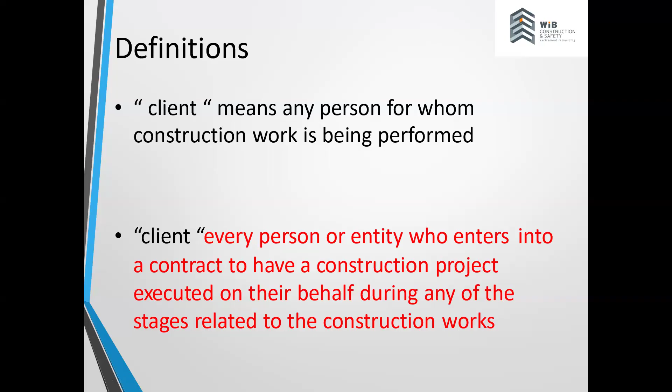Okay, the next definition was the old one. I've placed it in red font just so that you can see what the change has been implemented, or what they're proposing. So the next one is client: means any person for whom construction work is being performed. What was changed was - every person or entity who enters into a contract to have a construction project executed on their behalf during any of the stages relating to the construction works. Now we all understand when they're referring to the stages, they're speaking to the 6 stages which I previously presented.

Next, we have a new definition, which is the construction health and safety manager. Now, this was one item that I also strongly pushed from my end, because I felt that the construction health and safety manager were neither here nor there. It was mentioned in the gazetted notice that was shared, which was signed many, many years back by Thobile Lamati.

He was the previous chief - not chief, I forget his title now, but he was one of the senior guys at the Department of Employment and Labour, and he had submitted this gazetted notice. On there, it indicated that there was a CHSO, as well as the CHSM, which is the Construction Health and Safety Manager, and the PR agents, who are required to be registered with the SACPCMP.

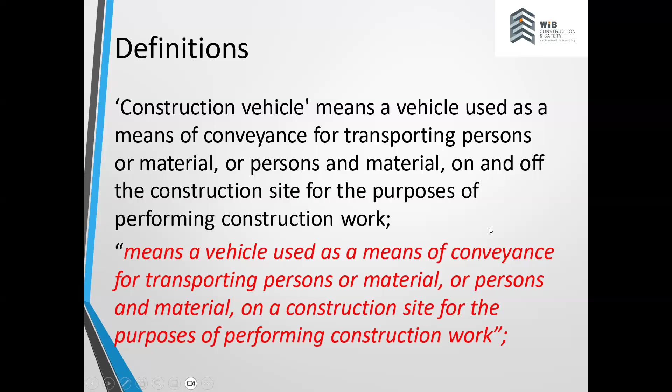Next, we had the construction vehicle, which was in the previous section. The new one reads, means a vehicle used as a means of conveyance for transporting persons or material, or persons and material on a construction site for the purposes of performing construction work. So that was just a clarification that was changed.

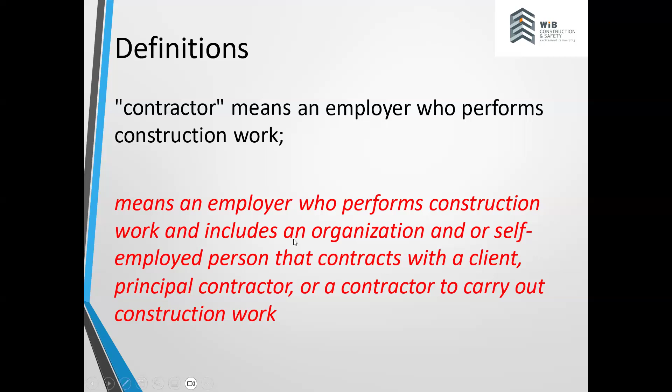Next, we have the contractor. So the contractor in the previous one means an employer who performs construction work. Very vague. In the revised one, we've indicated it means an employer who performs construction work and includes an organization and or self-employed person that contracts with a client, principal contractor, or a contractor to carry out construction work. So it's a lot more prescriptive and descriptive in this definition.

Next we have design. The definition of design, in relation to any structure, includes drawings, calculations, design details, and specifications. The revised one reads, design includes drawings, design details, specifications, and bills of quantities, including specification of articles or substances relating to a structure, and calculations prepared for the purpose of a design.

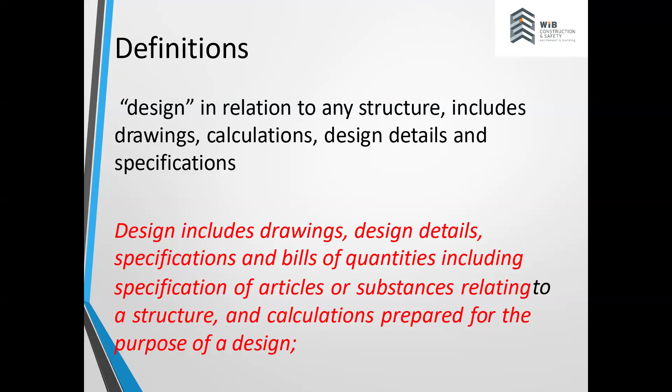Now, what's important here, and because of time I don't have so much time to go into too much detail, is a huge focus has shifted now to the designers, because a lot of the projects where large fatalities or large numbers of personnel have been killed, especially with, for example, the mall in Tongaat, that's a perfect example, a lot of them are relating to the design. There was poor design calculations, poor design when it came to consideration of the material to be utilized, the curing times. All of that was not properly defined by the designers. In the past, they were always the guys that were not in the firing line. But with the current revised construction regulation, the focus is now shifted a lot onto the clients and onto the designers as well. And then you'll see also some parts for the principal contractors and contractors also.

Under ergonomics, what we've also tried to do here is to align everything that is already existing. So for example, if there's an ergonomics definition under the ergonomics regulations, we're now utilizing that definition. Why? Because we don't want to create confusion within the industry by having different terminologies being utilized. We want to clear out any of that and ensure that everybody is aligned and using the exact same information.

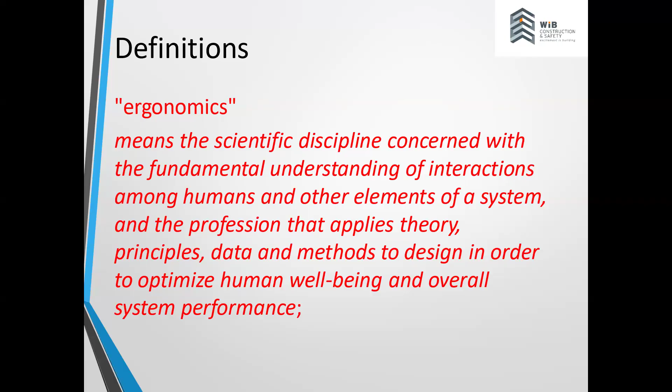So when we're referring to certain definitions, we should all be speaking from the same hymn sheet. Under the section, it says ergonomics means a scientific discipline concerned with the fundamental understanding of interactions among humans and other elements of a system, and the profession that applies theory, principles, data, and methods to design in order to optimize human well-being and overall system performance. As I said, if you go to the ergonomics regulation, under the definitions, you'll find exactly the same definition used there.

Under excavation works means the making of any man-made cavity, trench pits, or depression formed by cutting, digging, or scooping. The current one reads, means the making of any man-made cavity, trench pits, or depression formed by cutting, digging, or scooping, read with the definition of construction work. Now, why was this specific point added in here as well? To understand this, people were getting confused whether they are digging at a grave site, for example.

Okay, they're using an excavator there. They need to dig a grave.

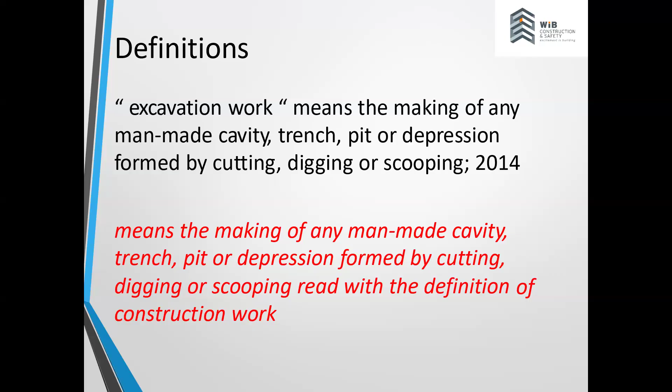Now the people were wanting to apply for what you call this, a notification of construction work, your annexure 2s. They wanted to start, so they started taking those to the Department of Employment and Labor. The definition was important to add because they need to understand that this is relating to construction work. It's not just only about making a man-made cavity, trench, pit, or a depression, etc., but it must be making it within the scope of work relating to construction.

So they're still working on the logistics around how they're going to manage this, because issues pertaining to no internet access can have an effect on inspectors coming to sites and not being able to view this electronic file. So all of those things need to be considered, and that's what we've been working on to see how they'll close out that issue. But the only change is besides the physical file, there's also the option of the electronic file on site.

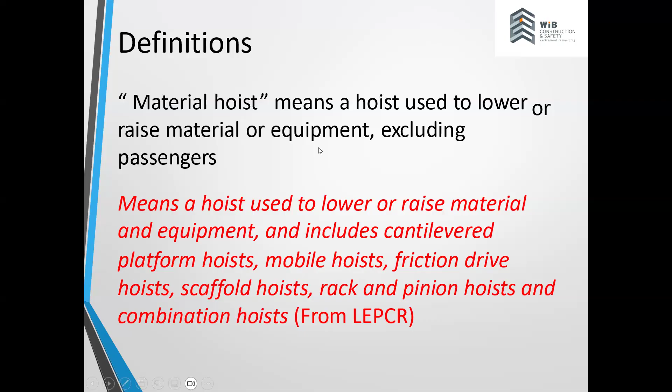And then when it came to a material hoist: means a hoist used to lower or raise material or equipment, excluding passengers. Now, in the revised one, it means a hoist used to lower or raise materials and equipment, and includes cantilevered platform hoist, mobile hoist, friction drive hoist, scaffold hoist, rack and pinion hoist, and combination hoist. So this is now all the different hoists mentioned within this, but you can clearly see it excludes passenger hoist, or your LEPCR, right?

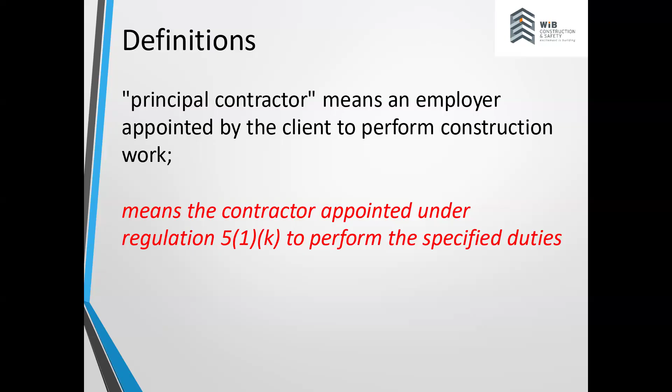And then here we have your professional engineer. Now, you would see that what we've also included, which was not on the previous one, is professional technologist or professional technician or certificated engineer, means a person holding a registration in terms of the Engineering Professions Act 2000, Act number 46 of 2000. So you can see this is now going back to ECSA, which is one of the bodies under the CBE.

And then provincial director, they've just included additional information: means the provincial director, as defined in Regulation 1 of the General Administrative Regulations, 2003, also referred to as the Chief Director, Provincial Operations. So they've just added that information in there as well.

And then what's new is also the terminology of project. It means a project which includes or is intended to include construction work, and includes all planning, design, management, or other work involved in a project until the end of the construction phase. That term was not included in the definition.

And then you have additional information relating to pre-construction, which was also not included. And why this is so important is because, as I explained, a lot of the fatalities that were happening on projects especially were relating to design issues and issues pertaining to pre-construction work that had an impact on the actual execution of the construction work itself.

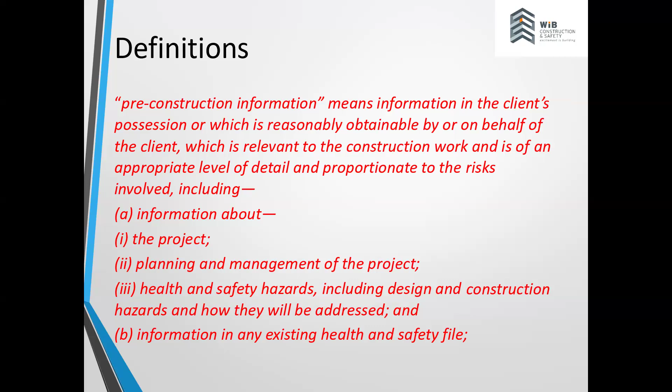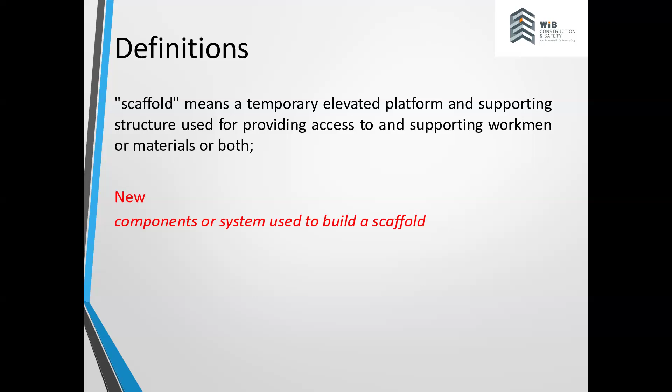And then under scaffolding, all we've done here is it's components or system used to build a scaffolding. You would see even in section 16 of the construction regulations, we've basically referred it to the SANS 10085. Instead of reinventing the wheel relating to scaffolding, all we've done is refer everyone to the SANS standard, which is our guideline that we need to follow. Everyone will use the same thing, so that there's no ambiguity and no confusion created.

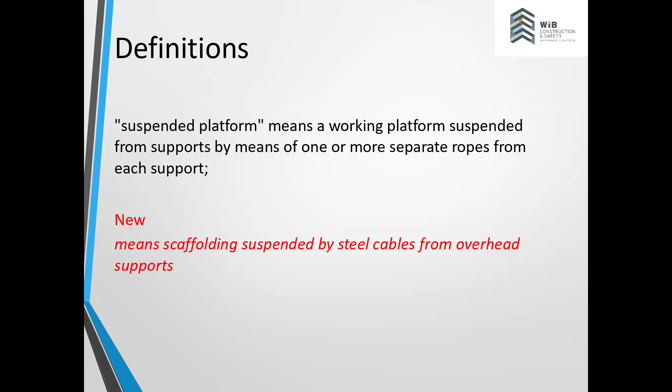And then when it came to a suspended platform, this created a lot of confusion within the industry, because every time somebody had a scaffolding built and it was a hanging scaffold, everyone was running around like headless chickens, because we needed to go to the Department of Employment and Labor for approval. Why? Because everyone was of the understanding that this is now a suspended platform. So the definition is clear. It says, means scaffolding suspended by steel cables from overhead supports. So that takes out the confusion of a hanging scaffold being considered now as a suspended platform. So it's quite clear.

And then under section 2.1 and 2.2, these regulations are applicable to all persons involved in construction work for the duration of the project life cycle. Also in regulation 11.2, it's applicable to owners of structures for the future lifetime of the structures as well, because that was also an important factor to consider. Many a time, everyone focused only on the actual construction execution, but the inspections that needed to be done thereafter, nobody went back and verified that these things are being done, or who's verifying that they are being done. So now it's being added into the regulations.

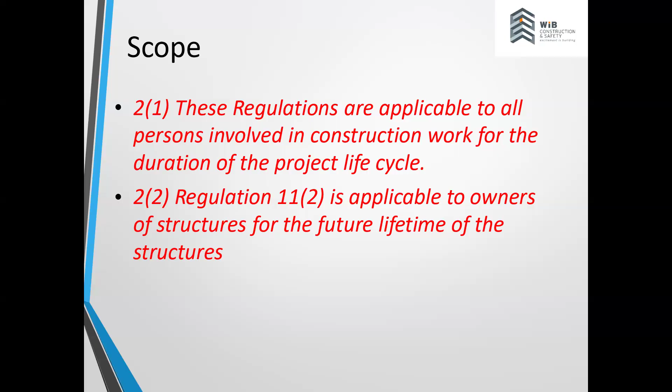So under the construction work permit section, you'll see the items in red. If everybody would remember, let me see. Okay, there's an exemption here. Let me just show you this first.

So on the 24th of July 2015, there was a government gazette notice 641, and that one had specific criteria and requirements relating to the exemption. Then the next one came out that was signed by Mr. Szana, Tibor Szana, on the 7th of August 2018, and that exemption is still in effect even up until today. It's still being used.

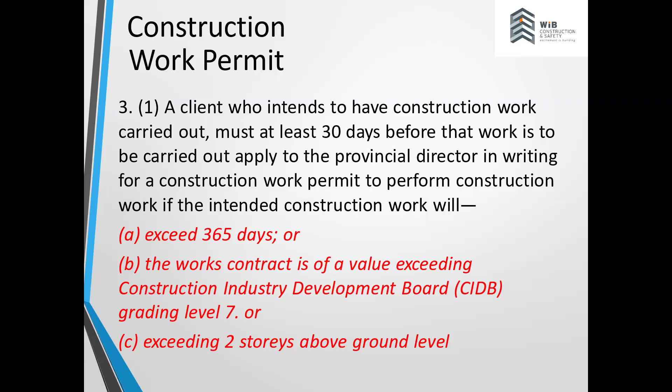And in your annexure 2, that's pertaining to your notification of construction work. So nothing has changed in this regard. Obviously what would change is the appointment letters.

I just want to run on this one, and I'm going to go quickly into the appointments because of time, so that we can make sure we get everything discussed as much as we can for this period we're together.

Under CR 5.1, you see that what we've included into section A is prepare a documented design risk assessment for an intended construction work project. Now the requirement for this is not only on the client, it's also on the designer. The designer is also required to ensure that there's a design risk assessment in place; the client will make sure that the designer has conducted the design risk assessment.

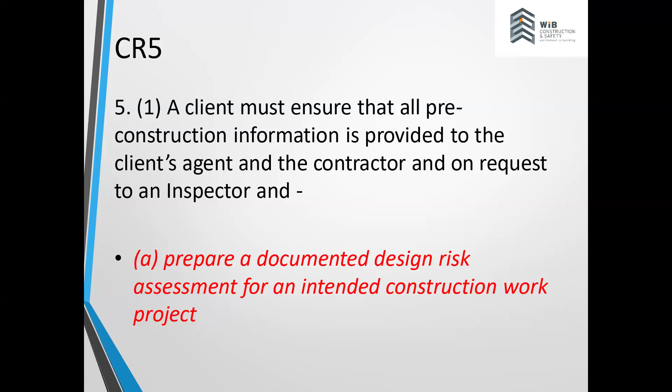So you would see that the baseline in itself will then fall away from the permit requirements because of the design risk assessment now that has been put into play. So the baseline risk assessment conducted by the principal contractor will still be done, but it is no longer the requirement of the client.

That's just speaking about the specification. Nothing's changed in this regard, it's still the same. And then what we've added here under the section is the designer takes the prepared health and safety specification into consideration during the design stage and provides a written report. That was not a requirement before.

Another important point here is to ensure that potential principal contractors submitting tenders have made adequate provision for the costing of health and safety. What we found in the past was that principal contractors were submitting tenders, but they were putting in the lowest cost they could because they were trying to get the job. The problem was that they were costing so low that they were cutting out the requirements of safety that needed to be implemented on those projects.

So with this being included in the proposed construction regulations, the changes are now forcing all contractors to ensure that proper provision for health and safety has been made and that it is something that is notable. So even if you're going into a kickoff meeting or bid clarification meeting, you should be able to ask as a client, client agent, or representative: show us your costing, how you costed for this job when it comes to health and safety.

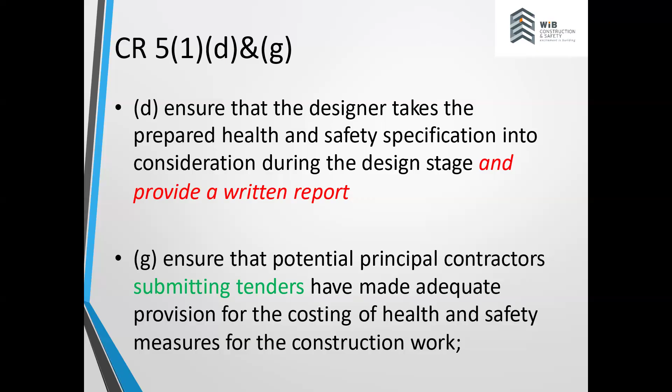What provisions were made? So now we can clearly see that companies are going to have to beef up their tenders when compiling them. They're going to have to beef it up so that they are not just going in on the bare minimum, but they now have to come up to the level required by law. And then after that, they can consider all other aspects of their costing.

The next one is pertaining to: provided that where there are multiple principal contractors or contractors on site, the party appointed by the client shall coordinate cooperation between contractors to ensure health and safety control. So this is now putting a lot more onus on the client. Obviously, the client will shift the responsibility to a construction health and safety manager or to an agent, depending on the size of the project.

And then this is just an inclusion to say: provide sufficient information and resources to the principal contractor. That hasn't changed. And then, as I said before, physical or electronic health and safety file — that's the only change there.

Now this is what I wanted to quickly touch on — some of the major changes that have come into play under section 8. 8.1 stays the same; that was previously the construction manager. Under section 8.1, remember previously it was 8.2 for the assistant construction manager. We've now added 8.1b, which clearly groups them into one bundle, showing 8.1 relates to the construction managers, and 8.2 relates to the construction health and safety managers.

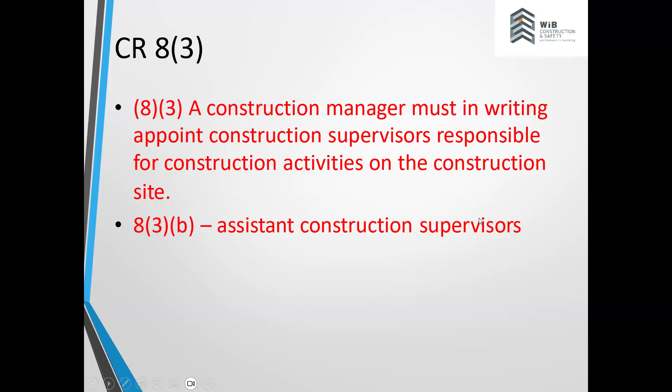Under section 8.3, a construction manager must in writing appoint construction supervisors responsible for construction activities on the construction site. Remember that was 8.7, and 8.8 was relating to the assistant construction supervisor. You see, we've grouped it as 8.3 and 8.3 - they should have actually read 8.3B. I must actually just speak to them about that. So 8.3B would have been the assistant construction supervisor under this section.

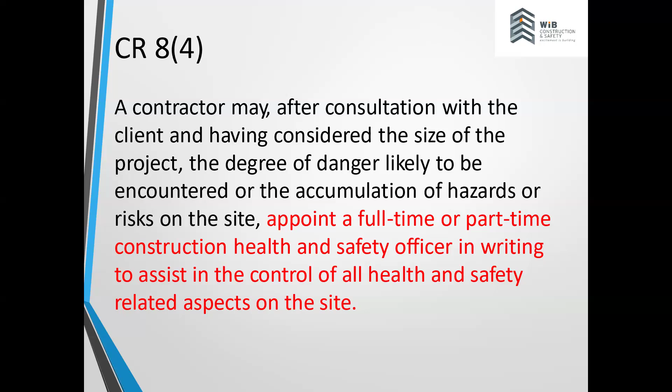And then a contractor may, after consultation - this is relating to the safety officer. So you see that the safety officer appointment was also changed. It was 8.5 before, it's now moved to 8.4. So it appoints a full-time or part-time construction health and safety officer in writing to assist in the control of all health and safety related aspects on the site.

That's the only change there to the safety officer section. And then this is still the same, nothing has changed - obviously we've just included the health and safety manager within the section as well, for the inspector to determine if there's a sufficient number of construction health and safety managers on that project. So they can look at the project based on risk, based on location, based on size of area, etc. There's various aspects they can utilize to determine whether one safety manager is sufficient or more than one safety manager and officers would be required for that specific project.

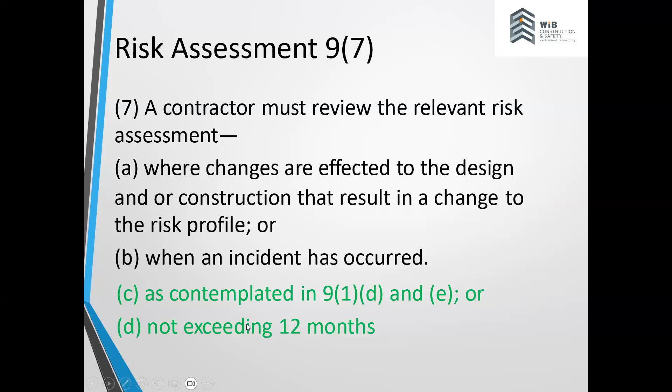And then under section 9, what we've included is section C as contemplated in 9.1D and E. So it's just relating again to that specific section, and it is not exceeding 12 months when it comes to our reviews of risk assessments. So we've been a bit more prescriptive in that regard. Yeah, nothing has changed.

So this section has changed relating to section CR13. So this is not Cyril Ramaphosa 13 - this is now relating to Cristiano Ronaldo. This is relating to the excavation section, right?

So where any uncertainty pertaining to the stability of the soil still exists, the decision from the designer referenced in 6.1, which is the appointed designer by the client, is decisive, and such a decision must be noted in writing and signed by both the competent person contemplated in sub-regulation 1 of this section and the engineer or technologist, as the case may be. So you see that we've linked this section back to the designer, so that we make sure they have the final say when it comes to such decisions being made.

Because we've encountered it too many times where people were passing away because of engulfment due to collapses of walls, etc., that are not being properly shored or braced, etc., with no proper consideration for the design of that and the stability of it, considering the soil types.

And in continuation of 13, it speaks about ensuring that no load material, plant, or equipment is placed or moved near the edge of any excavation where it may cause its collapse and consequently endanger the safety of any person, unless precautions such as the provision of sufficient and suitable shoring or bracing are taken to prevent the sides from collapsing.

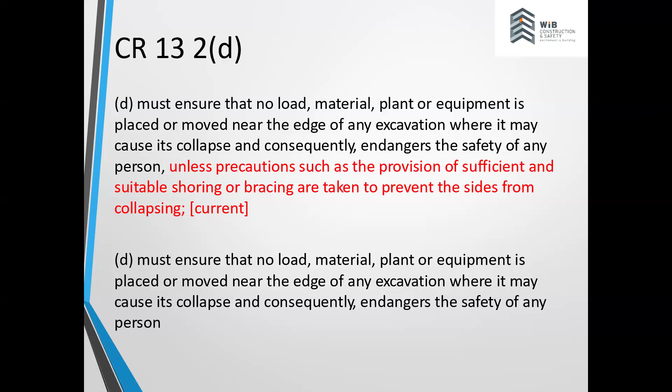So you can see that this was not considered previously. We know that shoring and bracing was being utilized, but some people argued the point and said the law doesn't require it because it's not stipulated. So we've now gone more prescriptive in that regard.

Okay, so under demolition work, that stays the same. We've only included that the competent person in writing supervise and control all demolition work. And here again, we've referred to it being carried out by a competent person, and that the method statement on the procedure to be followed in demolishing the structure is developed by that person. So it's clear now to understand who is the person in charge - it is a competent person who is there to supervise the demolition supervisor.

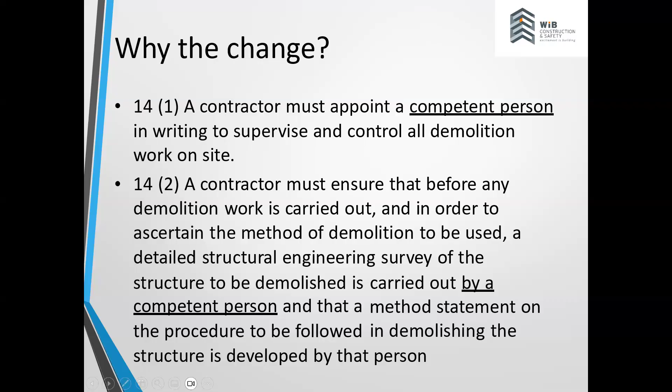And then other changes to CR14: 14.6 and 14.7 have been moved to Construction Regulation 27.

Section 49 has been updated to the asbestos abatement regulation. Obviously, we know that the previous one referred to the asbestos regulations, and that's been revised to the asbestos abatement regulation of 2020, and then also relating to specific reference to the Explosives Act and regulation. It's not a legislation, okay, it's just referred to in that section.

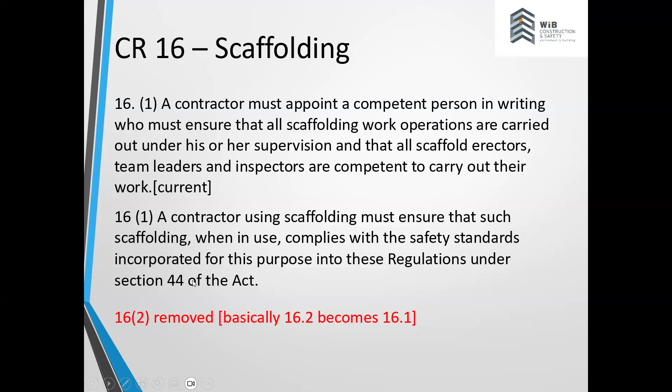Pertaining to scaffolding, section 16.2 has been removed. Basically, 16.2 has become 16.1. And as we said, the requirement is that you need to follow the requirements of SANS 10085.

Okay, so rope access - this is new. The section is to ensure that all rope access operators are competent to carry out their work. What's important to note as well is that the Working at Heights Institute has been... well, it's not really accredited - they've been certified as a body by SAQA, which allows them to certify contractors, trainers, etc., to ensure that the people being trained are competent.

So they are now in the process of getting training providers enrolled with them, and they will start having specific criteria and requirements for these specific people, including rope access, utilization of mobile elevated work platforms, and scaffolders. All of that will fall under their scope of work. So that's just a heads up with regards to what is coming on the horizon.

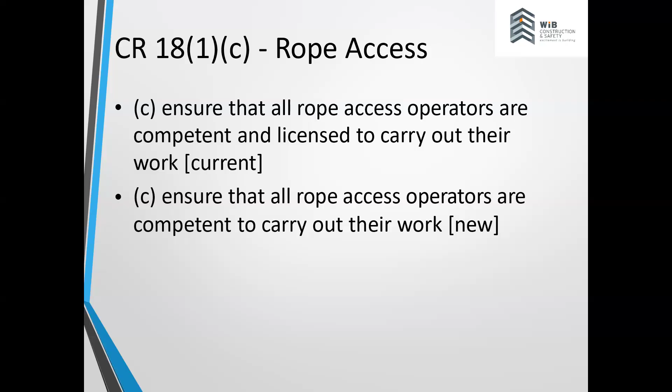I actually attended a presentation a few weeks ago where these items were also being discussed.

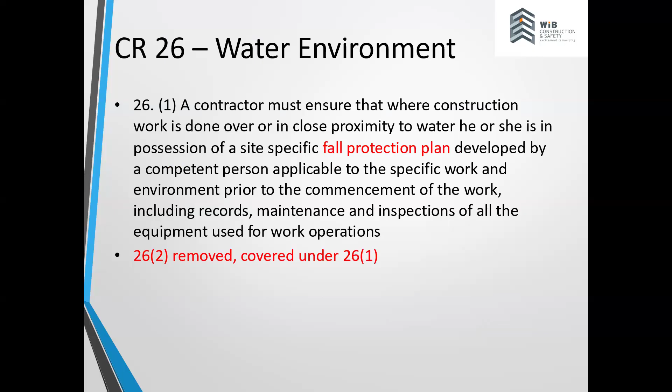26.2 was removed and it was covered under section 26.1. So 26.2 has been completely removed.

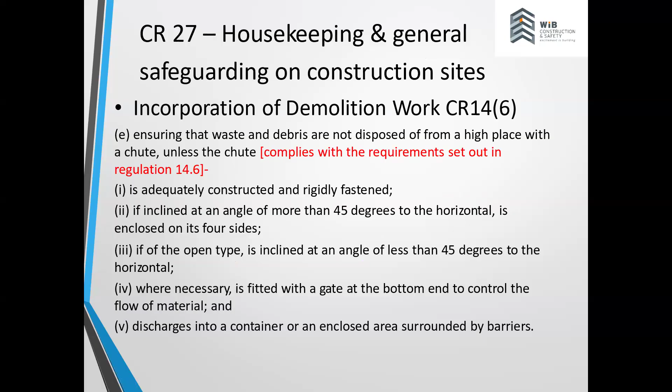And then in the housekeeping and general section, you'll see that it complies with the requirements set out in regulation 14.6 under incorporation of demolition work, where this was previously in the housekeeping section. We've now included it in the demolition section under section 14.6.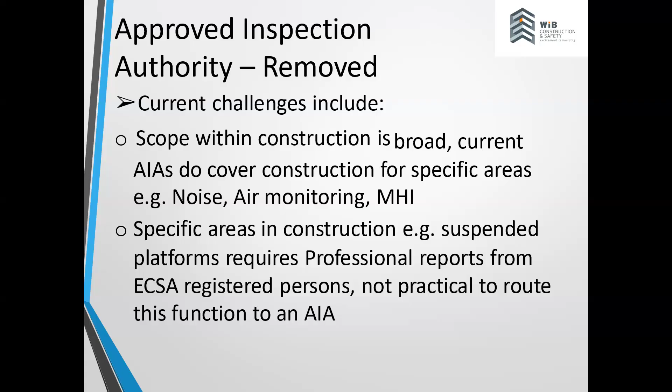Okay, and then the approved inspection authority has been completely removed from the act. You will no longer find an inspection authority within the construction regulations. There are still AIAs - don't misunderstand what this means in this section. It's only meaning that from construction regulations from the Department of Employment and Labor, they are no longer recognizing people as in the sense of an AIA under the law itself.

Okay, the annexures are still the same. Sorry, there's no change for Annexure 1 pertaining to your permit. Annexure 2, obviously, as I've mentioned, there's going to be changes pertaining to the appointments and the inclusion of the Construction Health and Safety Manager, Section 8.2. So that will also be included within Annexure 2. And then under Annexure 3, which is relating to your medical fitness, there is no change.